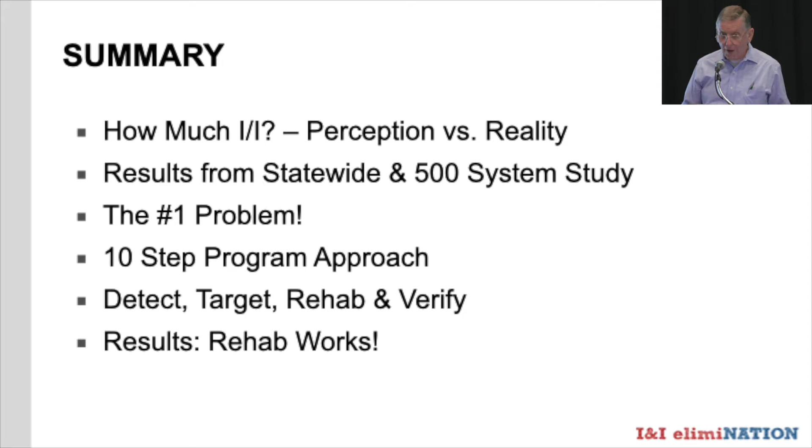And because of that, I worked out a 10-step program approach of what was really critical to have in a program. Now, this session today really doesn't allow time to go into the 10-step approach, so I'm going to boil it down for you: detect, target, rehab, and verify. And I'll go into those when we get to that part. The result, and you may wonder, well, why isn't this an assumption or a given that the rehab works? I contend that we're still dealing out there with municipalities and engineers that really don't believe it. So I'm going to go into some actual data, similar to what Tony presented, that it actually does work. You can deny it, but data is out there that it does work.

So looking back at what people actually think. What happened was in about 2014, I was doing this analysis of every system in the state of Tennessee. And I found that as I was doing it, I had to go back to actually every NPDES permit and the application that a permittee would make to get the permit. And when I looked in there, I found that it required that everybody had to put down the amount of I&I that they thought or measured or however they came up with it, but they had to have a number in there in order to be able to get their permit.

And it was very interesting. I thought, well, let's find out what people think. And this graph that you see here is the percent I&I actually reported by applicants for the NPDES permit. There was like 243 systems that I was looking at the time.

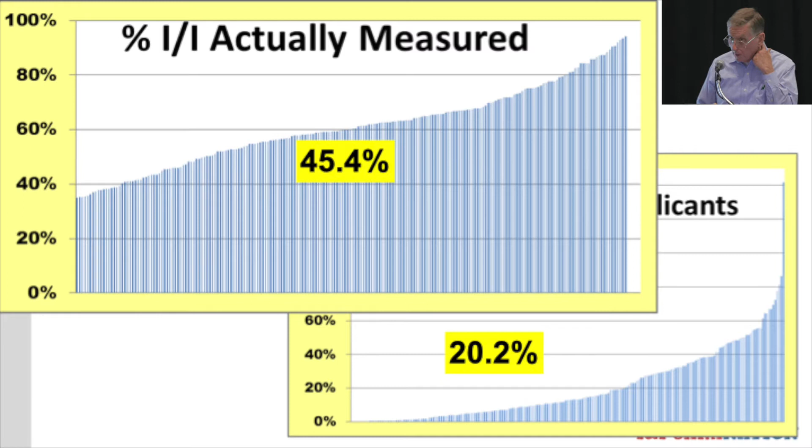And when I looked at the aggregate, in other words, if you considered all the I&I that they reported as though that was all pouring into a big bucket all year, that meant that the aggregate was slightly over 20% of the flow in all the Tennessee systems was considered to have been clear water. In other words, have its origin from either infiltration or inflow. So this was the opinion of people who are applying for NPDES permits.

So when I actually took their data, keep in mind, I used 365 days worth of data of rainfall, flow, and BOD, which is another story in itself, of what was actually being measured by these people, and the I&I that was actually measured was 45%. Big difference.

Now, something else I want to point to, because I want to look at these data in a slightly different way in the next slide, is that the lowest point on the first graph here does not correspond to the same city on the second graph. In other words, I reoriented these lists of towns so that it would just flow from left to right, nice and easy. So let's take a second look at this I&I variation.

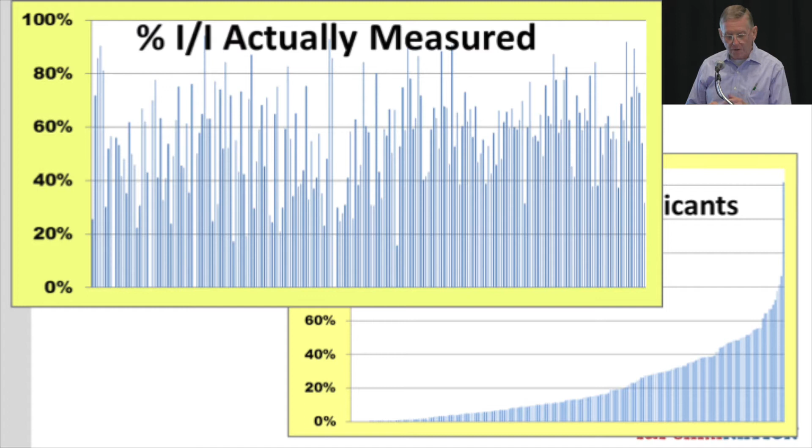Again, the first graph is what you already saw, but when I lined it up city by city, so that starting at the left, it's the same city that is on the lower slide, this varies all over the place. In other words, somebody who had an original estimate of low I&I may have been near the top, and somebody who had a high estimate may have been somewhat lower. So this was variation all over. This suggests to me it was jumping all over the place. They really probably didn't know at all.

So just as a recap, the average I&I that was reported, aggregate, was a little over 20%. The number that I finally found, which was eventually used for the ASCE report card that year for the state of Tennessee, was more than twice that amount. That leads me to believe that most public agencies likely didn't either know how to measure their own I&I, or hadn't even thought about it, or didn't want to think about it. Which is really kind of a sad thought in my mind.

So I had an opportunity to extend this study from the 243 for the state of Tennessee. Then I was able to get hold of an equivalent amount of data from the state of North Carolina, lumped that all together, and then I put out kind of a national challenge on LinkedIn. And I said, anybody who will send me a year's worth of data, I'll send you back a report. No cost, no strings attached. I won't bother you again. I'll answer your question if you call me about it.

And of that, I only had 9 takers. 9 takers. Free data, free engineering. Shows you can't give anything away. But obviously, I've flunked marketing 101 really bad. Don is over here just laughing away.

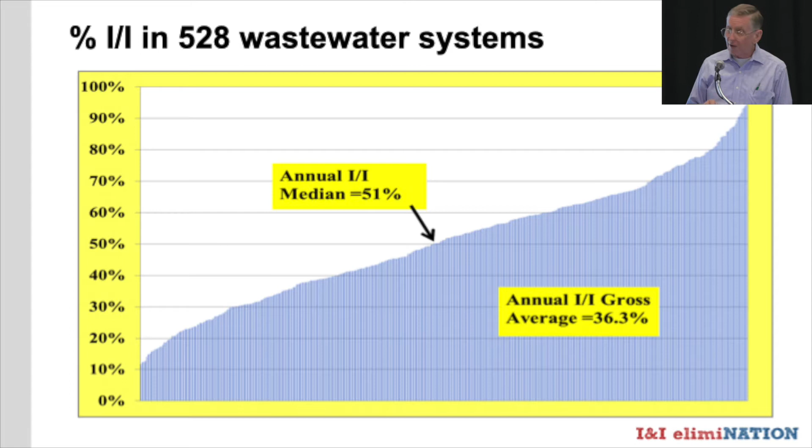So anyway, of all the different kinds of problems that a collection system operator has, they've got providing good service, they've got costs they've got to face, they've got overflows. Tony went over a bunch of them. Robert went over a bunch today. But I feel like the number one problem they're facing is I&I, leaking sewers. That's what it boils down to. I don't care whether it's infiltration or inflow. I mean, I care if I'm doing the analysis, but really looking at the problem, that's what it is.

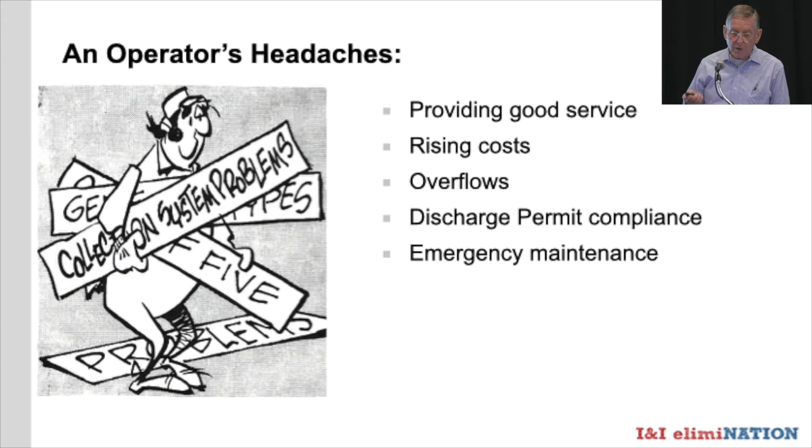And here we see almost the same list: SSOs, backups, degrading treatment efficiency because plants get overloaded, wasting money, increased costs, movement, loss of bedding material, so then you eventually lose the pipe, and then pipe collapses. The bottom line here is that what a lot of people thought they could do was upsize the pipes and upsize the facilities, but this doesn't fix the original problem.

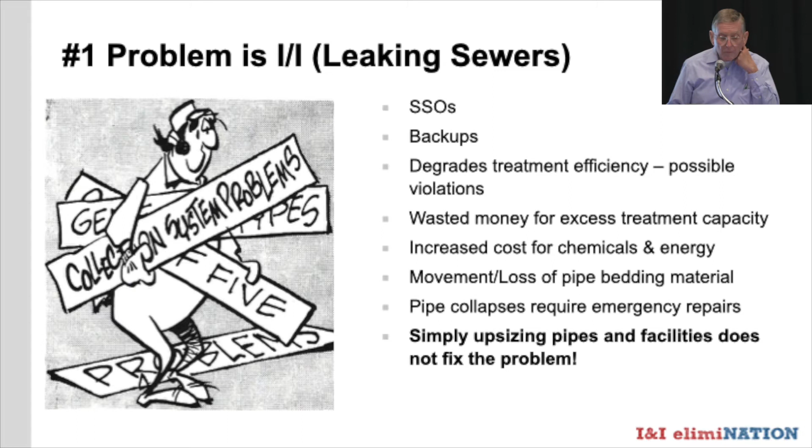And I had a very pointed example of that when I was doing the research, because when I did this study, I had to go back and I transcribed over 170,000 data points from hard copy papers into an electronic file. So I had to go through all this stuff at the various state offices.

And when I was doing that, I found this overflow report for the town of Bell Buckle, which is about an hour and a half south of Nashville here in Middle Tennessee. And what was kind of neat, this jumped out at me because I recognized Bell Buckle. They were on the original Conklin report back in 1981.

But what really jumped out at me was this note here that this overflow was being reported from the equalization basin, which had been built as the answer to take care of excess flow in the system. The Conklin report, when I dug it back out of my files, I'm a pack rat, had mentioned that this was a report that really had sent shockwaves through all the state regulatory agencies.

And I was working for Bob Odette at the time in the state of Tennessee. And essentially that report was EPA's summary that sewer rehabilitation wasn't working very well to accomplish I&I reduction. And this was a real shocker because the whole 201 program was really hinged on that basis of building treatment plants that were going to be able to operate efficiently.

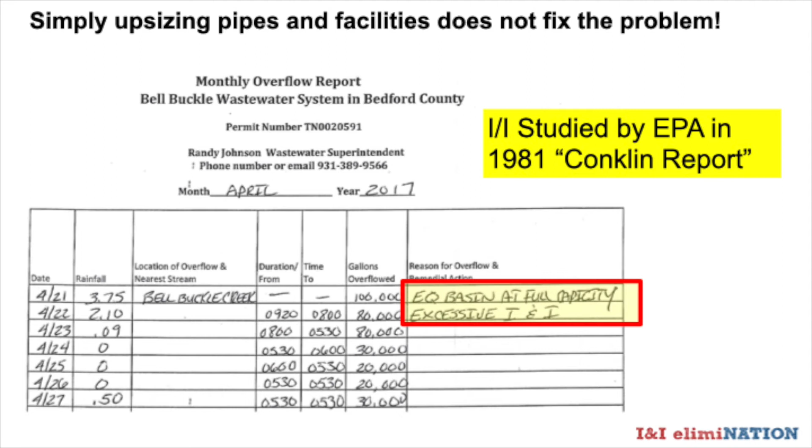So looking at what does work, and this was foremost in my mind when I started getting into doing sewer rehabilitation for various companies and municipal agencies, primarily here in Middle Tennessee. And I saw things that worked and saw things that didn't, and compiled it finally into a 10-step program. I'm sorry, I didn't mean it to sound like Moses and the 10 Commandments. It's just 10 recommendations, but they seem to work.

And it's really too long to go into for this presentation, but it really comes down to 4 essentials. 1, detect. Got to detect the I&I, got to be able to quantify it, be able to say what you have. Secondly, target the right area. I would certainly underscore and echo Tony Khan's point about going after a basin rather than the old EPA approach of take the biggest leak first and then go to the second biggest leak, which can be jumping all over a system, and you won't see results for a long, long time.

And I don't know why I did that.

Oh, here we are. Then, of course, plan and conduct your rehabilitation correctly, and I'll have some thoughts about that. And then finally, verify that you got your result. And this is something that I think has gotten lost with a lot of engineering companies. The ones that are general engineering companies, they construct a building. Well, you have your plans and your specs, and you hire your contractor, and you build the building. At the end of the job, you got a building. Everybody's happy. Hopefully the building works, but you see what you have.

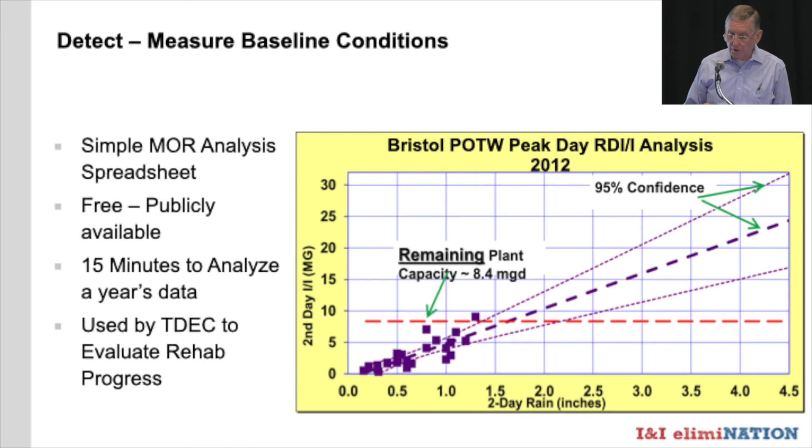So it gives us a means to actually let you know where you stand. Now, thinking about selecting the target area, and emphasis on the word area. As Tony pointed out, I'm an advocate of picking a basin area rather than simply a single line or a single defect. That's the worst kind of situation. You've got to stop migration.

In this case, it shows an area in the town of Brentwood, which is a satellite community to Nashville, where we are today. Satellite meaning that they don't have a treatment plant. They just pump it over to Nashville's treatment plant. And it turned out that this area, E11, up in the north side of Brentwood, was one of the worst areas I've ever seen in my professional life. But we used all the standard criteria, looking at overflows, annual I&I, their peak hour I&I, and the overall condition as some of the main things to look at.

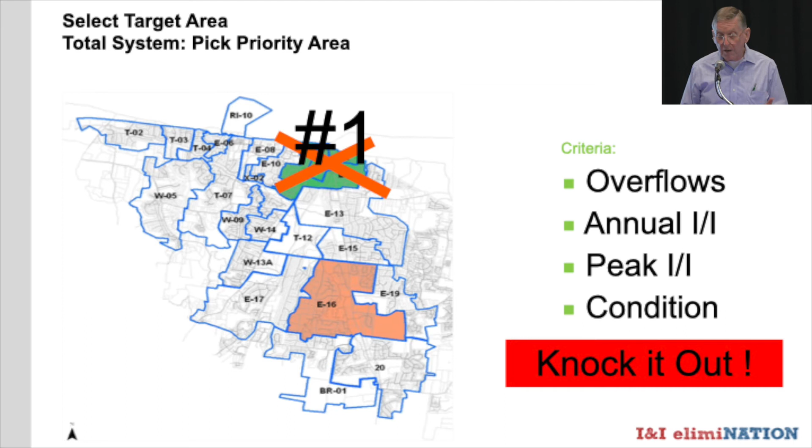But the point I want to make is pick the area which is your top priority area and knock it out. That's to stop migration. And then it's also kind of like the idea of eating an elephant. You eat it one part at a time. Once that area is gone, then you can work on the rest of the system.

So looking at the rehab essentials, I advocate, and I think it was very similar to what Tony was talking about, a system approach. And that is looking at the pipes, manholes, and service laterals. He likes to do them staggered. That's fine. I like to do it all as one project. I assume that it's kind of like that path independence in calculus that we learned years ago, which I've mostly forgotten, and it's still going to arrive at the same endpoint if you do all the steps.

But one other point I'd like to make is the idea of connecting the dots, and that is you may find a segment that's got a lot of defects and a segment two segments down that's got some more defects, but the intervening segment really didn't look all that bad. They say, well, why do anything about that? Well, let's think about it. It was usually in the same kind of topography. It was built by the same crew, same materials, same age. In my view, it probably just hasn't quite reached that point where it's going to start showing defects yet. Why not get it while you're there?

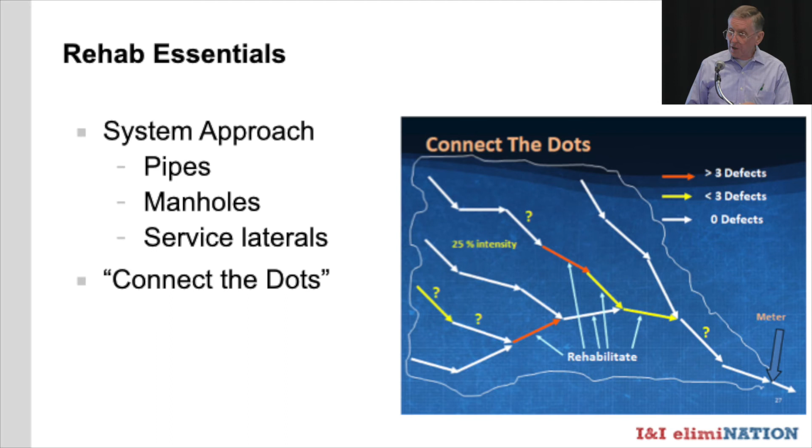And this was one of the major lessons that I got when I developed that 10-step approach, because we began seeing that kind of pattern. If we fixed all the stuff that we saw and we didn't do the connect the dots, we started seeing more rapid deterioration in those connecting segments. Verifying effectiveness. Sure, it costs some money to go back and do some flow monitoring again, but to me, this is gold. And this is an example in that worst area there in Brentwood, E11.

The blue line, which is the upper line, and by the way, the dotted lines on each side of these two solid lines, what that represents is a 95% confidence interval. Now, from an engineering standpoint, the way I was taught as an engineer, you never can really be absolutely certain about the absolute value of a particular measurement. It always has a plus minus value on it. And I think for design purposes, it's important to show that, because these are all statistically based types of analyses. But anyway, in this case, the data was pretty darn tight. And you can see that we got a very nice reduction there in that E11 area.

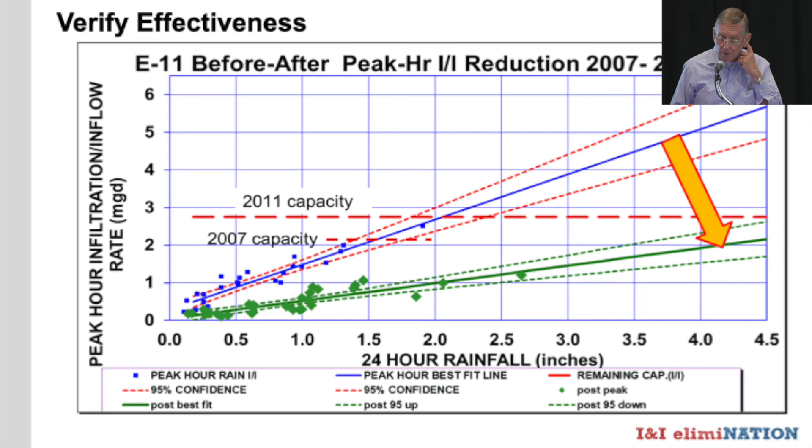And the final result for the 4.5 inches, that represents essentially the 5-year storm here in the Middle Tennessee area. Now that endpoint for the 5-year storm is below the capacity for that piece of line, or for that flow monitoring area. So now we have achieved containment, at least. We may not have achieved as much I&I reduction as we could, but we've got containment so that we're not going to be risking overflows.

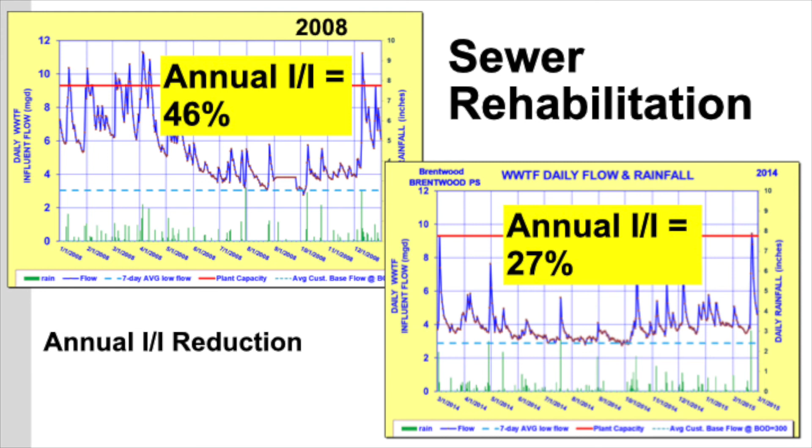So a couple other measures to verify, just about 3 slides left here. One is going from 2008 of just the annual hydrograph for that area. The annual I&I calculated for 2008 for the Brentwood system, this is for the whole system, was about 46%. When we pretty much wrapped up the program there in 2014, they still have some work going on, the annual I&I was slightly over half of that. Actually, they got out about 800 million gallons a year of clear water removed from that system. They still have a ways to go.

Looking at the RDII reduction, the 5-year RDII projected out to about 10.7 million gallons in a 24-hour period. Now that's not the base flow; that's strictly related to the rainfall. By 2014, it had been knocked off about 2 million gallons, which got it quite close to containment. It wasn't absolutely there, but it's pretty much close to the capacity of the treatment plant.

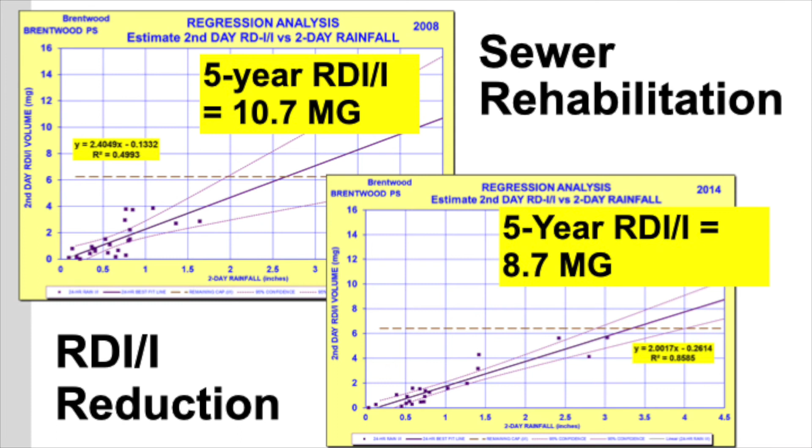The final one I'll show you is a conglomeration of the results from all 29 project areas that we measured in Nashville and in Brentwood. My policy is I don't like to see a line across a graph where you don't see the data points. I kind of have a thing about that. I want to show the good, bad, and the ugly, and you've got it here. You can see some of those project areas didn't get, by our measurement, any I&I reduction. And to be fair, some were installed primarily for structural reasons, so they weren't going to show any.

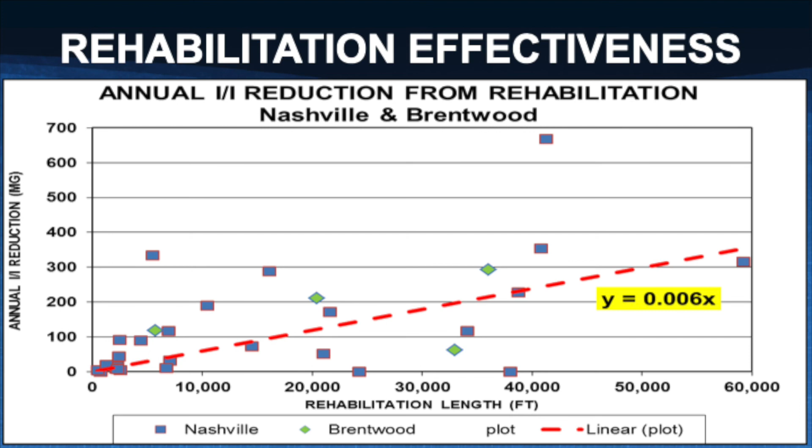But the one I'm pretty proud of is the one that you see right up there near the top of the graph. It's right close to the D in Brentwood. And that project was conducted using rigorously all 10 steps of the 10-step plan that I mentioned earlier, and did the before and after reduction. However, for all the calculations that I use as far as cost savings in Tennessee, I use the dotted line that's shown there, which is building in a safety factor, and which kind of handicaps the situation, but it keeps us from overestimating.

In closing, I would never have been able to do this work of the statewide study without a great deal of assistance from people in all 7 of the basin offices across the state, helping gather and collate these MOR reports. I still had to do the transcription, but they were really of great assistance. Also, just for recognition to Ken Kerri and the Sacramento State courses where I sourced the little figures. So with that, questions?

Very impressed. Thank you. George, how long did it take you to build your spreadsheet? Are you getting great attention to that? Are people picking up the usage of that spreadsheet that you've developed? Thank you for the question. Are people picking up on the spreadsheet? I'm very happy to say that the state of Tennessee has. I've negotiated and discussed this with the state a lot, and I handed over the results, all the raw numbers and the final reports to the state of Tennessee.

And some people, this bothers them. I've run into situations where communities think this is top secret. I'd rather not speculate on some of the more negative implications there. But I turned it all over to the state with the idea that how can we possibly achieve any progress in understanding our problem and working out a strategy to correct it if we don't know the nature and the extent and the quantity of the problem to start with. I used to be a military intelligence analyst, and I specialized in Soviet East Europe. Part of my job was counting missiles, and I don't know any other way to go about this. So that's why I turned to the state.